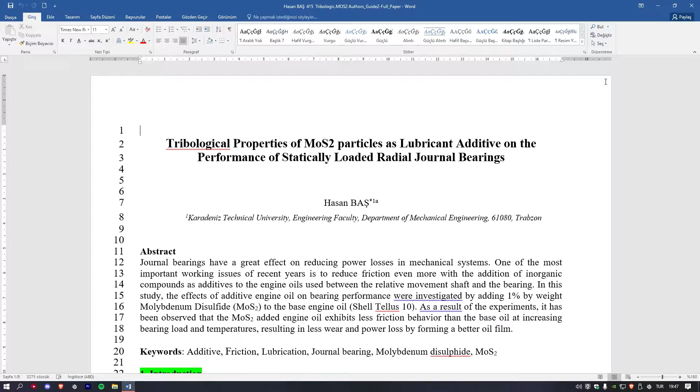My topic is Tribological properties of molybdenum disulfide particles as lubricant additive on the performance of statically loaded radial journal bearings.

Journal bearings have a great effect on reducing power losses in mechanical systems. One of the most important working issues of recent years is to reduce friction even more with the addition of inorganic compounds as additives.

To the engine oils used between the relative movement shafts and bearings. In this study, the effect of additive engine oils on bearing performance was investigated by adding 1% by weight molybdenum disulfide to the base oil Shell Tellus 10.

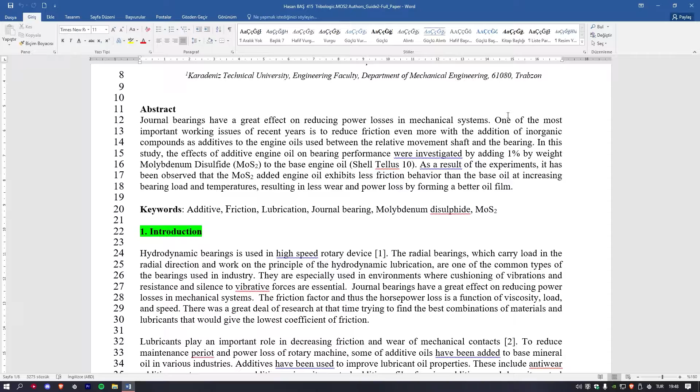As a result of the experiments, it has been observed that the molybdenum disulfide added engine oil exhibits less friction behavior than that of base oil at increasing bearing load and temperatures, resulting in less wear and power loss by forming a better oil film.

Lubricants play an important role in decreasing friction and wear of mechanical contacts. To reduce maintenance period and power loss of rotary machines, some additive oils have been added to base mineral oil in various industries. Additives have been used to improve lubricant oil properties.

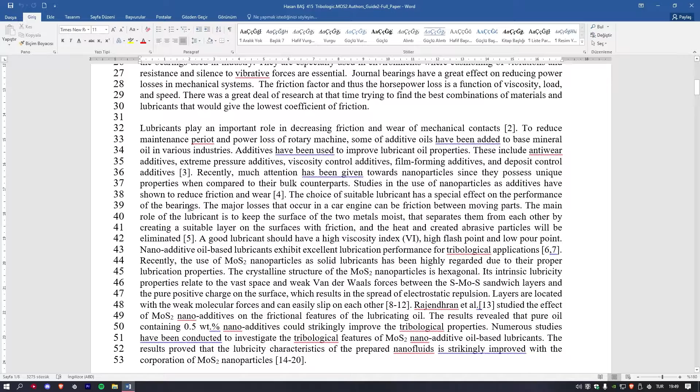These include anti-wear additives, extreme pressure additives, viscosity control additives, film forming additives, and deposit control additives. A good lubricant should have a high viscosity index, high flash point, and low pour point.

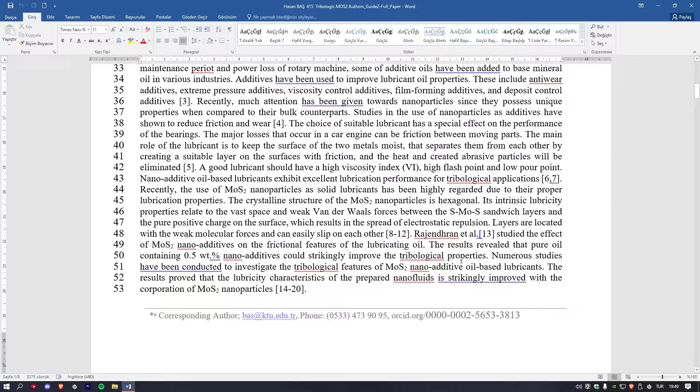Nano-additive oil-based lubricant exhibits excellent lubrication performance of tribological applications. The result revealed that pure oil containing 0.5 weight percent nano-additives could strikingly improve the tribological properties.

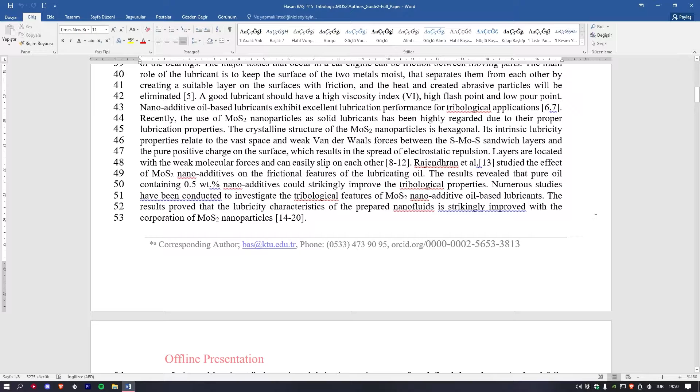Numerous studies have been conducted to investigate the tribological features of molybdenum disulfide nano-additive oil-based lubricant. The results proved that the lubricity characteristic of the prepared nanofluid is strikingly improved with the incorporation of molybdenum disulfide nanoparticles.

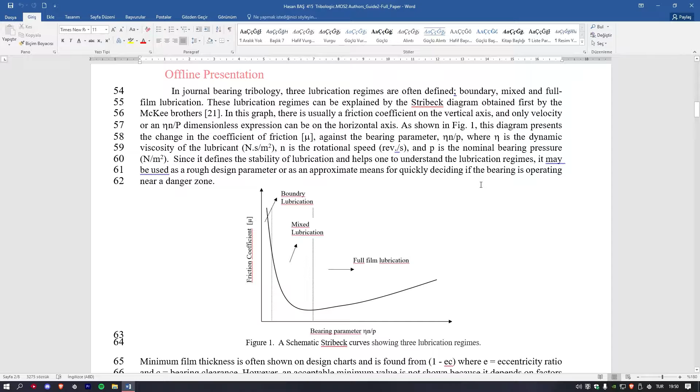In journal bearing tribology, three lubrication regimes are often defined as boundary, mixed, and full film lubrication. These lubrication regimes can be explained by this Stribeck diagram as shown in figure 1.

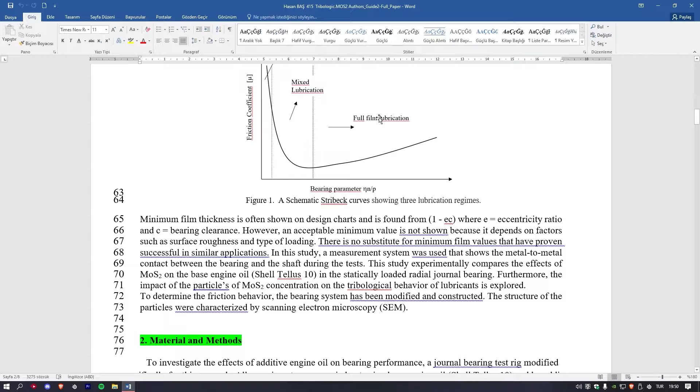This section is boundary lubrication, second section is mixed lubrication, third section is full film lubrication.

In these experimentally working sections, this study experimentally compares the effect of molybdenum disulfide on the base engine oil Shell Tellus 10 in the statically loaded radial journal bearing.

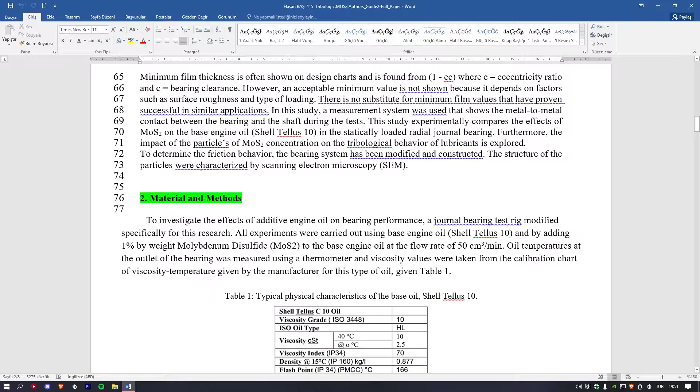Furthermore, the impact of the particles of molybdenum disulfide concentration on the tribological behavior of lubricants is explored. To determine the friction behavior, the bearing systems has been modified and constructed. The structure of the particles were characterized by scanning electron microscopy.

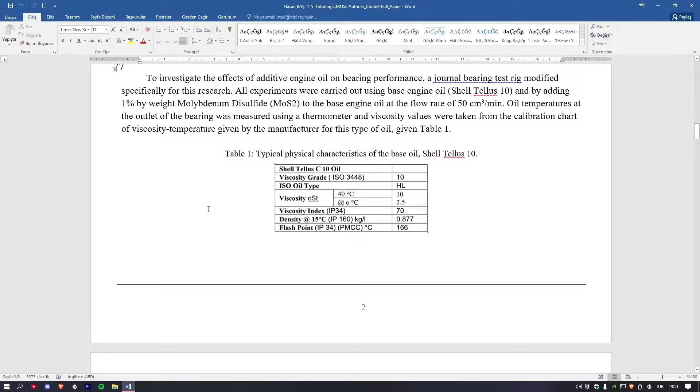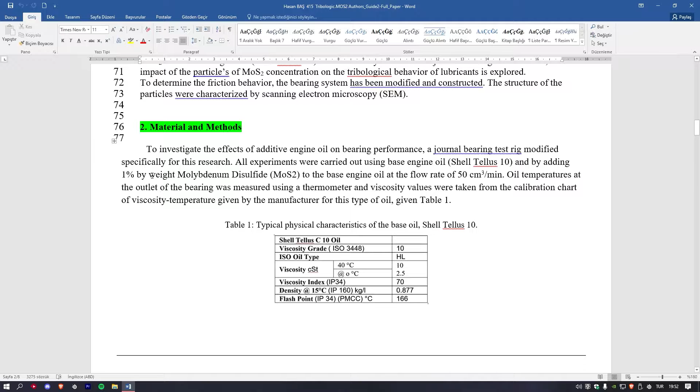Material and methods. To investigate the effect of additive engine oil on bearing performance, a journal bearing test rig was modified specially for these researches.

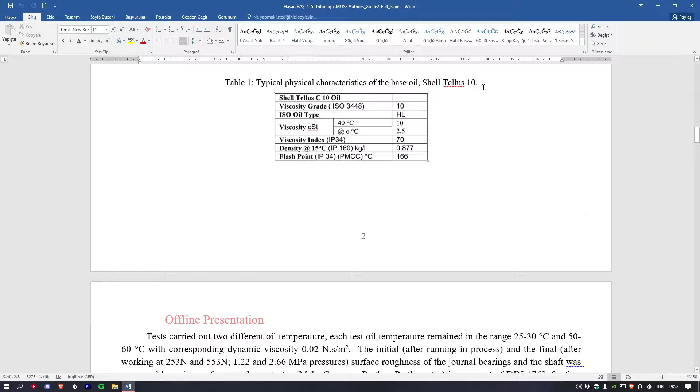Typical physical characteristics of the base oil Shell Tellus 10 are shown in Table 1.

Tests carried out at two different oil temperatures. Each test oil temperature remained in the range of 25 and 30 degrees centigrade, and 50 and 60 degrees centigrade, with corresponding dynamic viscosity of 0.02 Newton seconds divided by square meters.

The initial, after the running-in process, and the final, after working at 253 Newton and 553 Newton.

Surface roughness of the journal bearing and the shafts was measured by using a surface roughness tester in pursuant of DIN 4768.

Surface roughness parameters such as center line average, average peak to valley height, and maximum peak to valley height were measured by using a driving unit.

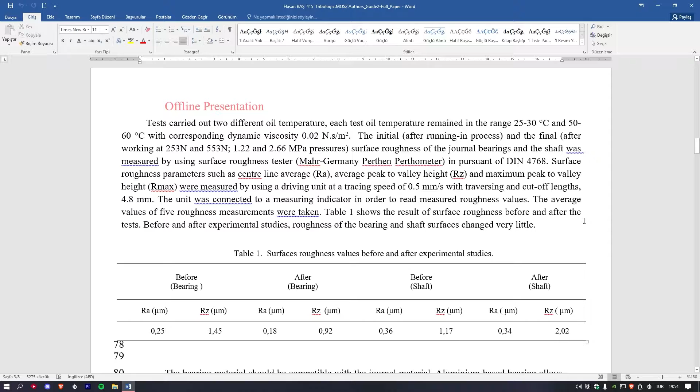The average values of the 5 roughness measurements were taken. Table 1 shows the results of the surface roughness before and after tests.

The chemical composition of the alloys and measured molybdenum disulfide particle size range is shown in Table 2.

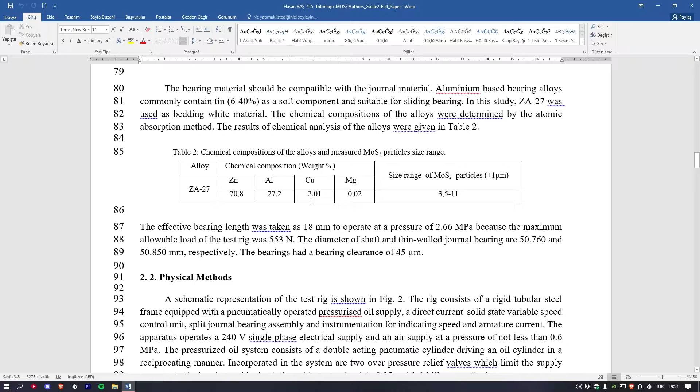The effective bearing length was taken as 18 mm to operate at a pressure of 2.66 megapascal, because the maximum allowable load of the test rig was 553 Newton.

The diameter of the shaft and thin-walled journal bearing are 50.760 and 50.850 millimeters respectively. The bearings had a bearing clearance of 45 micrometers.

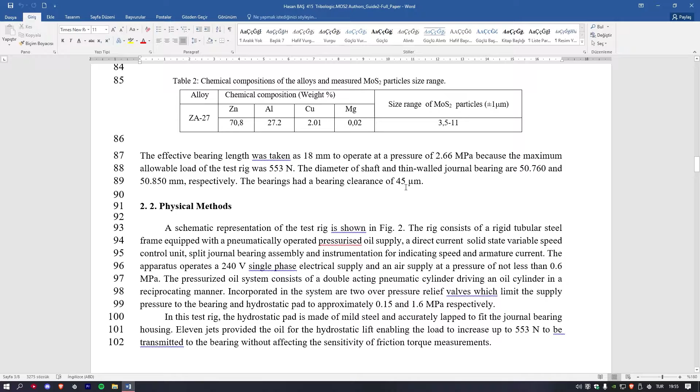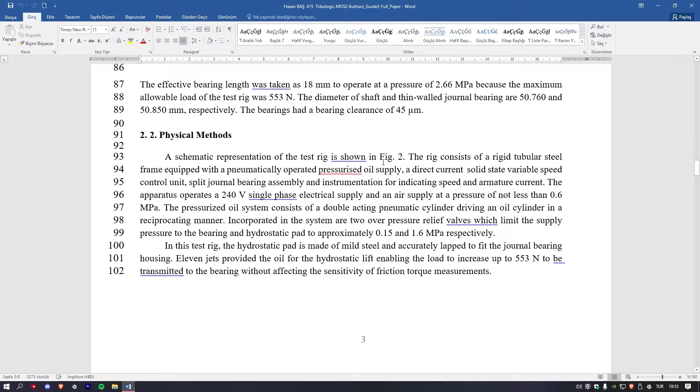Physical methods. A schematic representation of the test rig is shown in figure 2. As shown in figure 2,

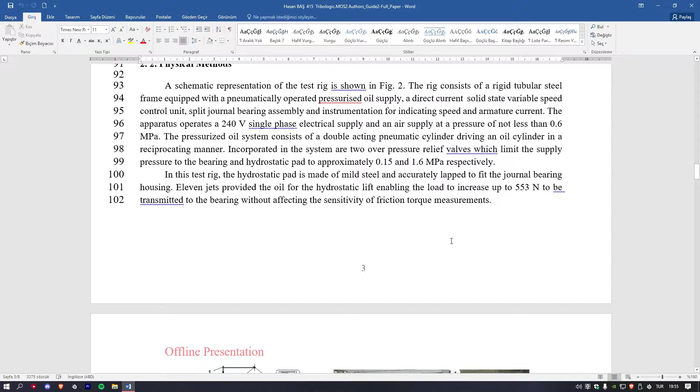The rig consists of a rigid tubular steel frame equipped with pneumatically operated pressurized oil supply, a direct current solid state variable speed control unit, and a split journal bearing assembly, with instrumentation for indicating speed and armature current.

The apparatus operates on a 240 voltage single phase electric supply and an air supply at a pressure of no less than 0.6 megapascal.

In this test rig, the hydrostatic pad is made of mild steel and accurately lapped to fit the journal bearing housing.

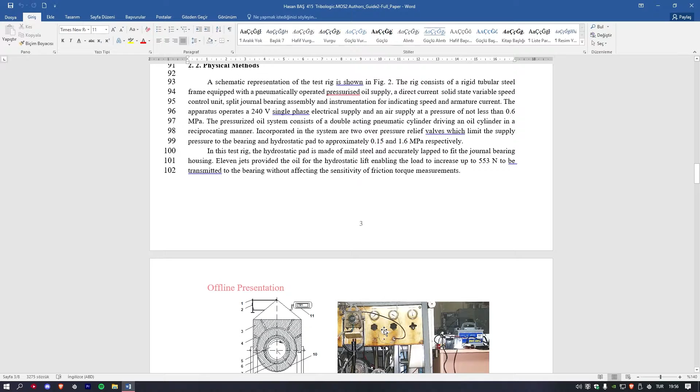11 jets provided the oil for the hydrostatic lift, enabling the load to increase up to 553 Newton, to be transmitted to the bearing without affecting the sensitivity of friction torque measurement here.

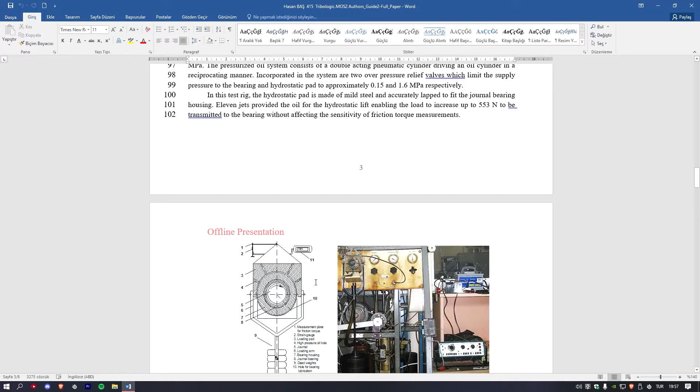The friction torque was measured by using a Wheatstone bridge circuit with strain gauge on the torque plate.

The torque signal obtained from the bridge circuit was transmitted to the recorder, and this enabled monitoring and recording the signals.

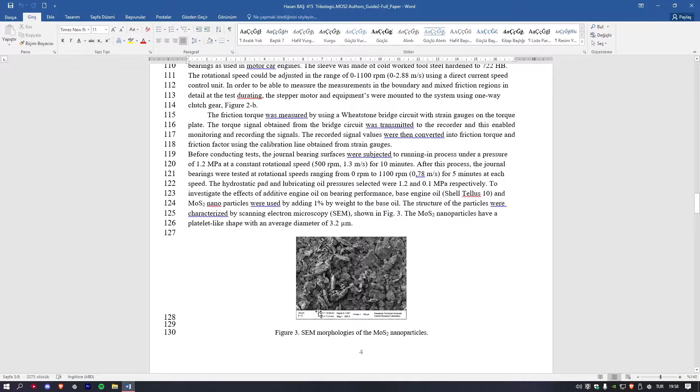After this process, the journal bearings were tested at rotational speeds ranging from 0 to 1100 RPM for 5 minutes at each speed. Then the structure of the particles were characterized by scanning electron microscopy, as shown in figure 3. The molybdenum disulfide nanoparticles have a platelet-like shape with an average diameter of 3.2 micrometers.

Results and discussions. It's seen in figure 4. As shown in figure 4, using molybdenum disulfide additives, lower friction torque values were obtained in the test compared to the base oil. This difference is even more pronounced in boundary and mixed friction regions.

For example, an average increase of 0.3 and 0.6 Newton meter is observed in the friction torque at 253 Newton and 553 Newton bearing loads in the boundary friction region respectively. It is seen that the friction torque values in the bearing increase with the increasing bearing load. As a result, it has been determined that the effect of molybdenum disulfide additives is dominant in the metal-to-metal contact operation conditions than that of the liquid film regions.

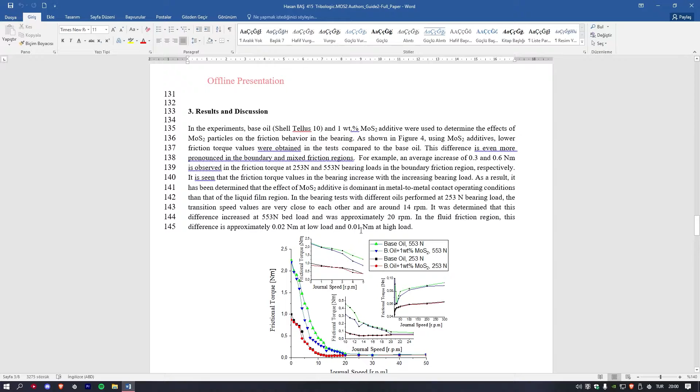In order to determine the friction coefficient in the plain bearing, firstly the peripheral friction force values in the bearing were measured, and then the friction coefficient values in the bearing were obtained by taking the ratio of this friction force to the bearing load. The effect of different oil on the friction coefficient is given in figure 5.

As can be seen in figure 5, higher friction coefficient values were obtained in the base oil test compared to the molybdenum disulfide additive oil. This difference is even more pronounced in the boundary and mixed lubrication regions. It's seen that the friction coefficient values formed in the bearing decrease with the increasing bearing load.

The reason for the decrease may be that, compared to the friction force, the increase in the bearing load is higher, or the internal friction of the oil decreases as a result of the thinning of the oil film between the surfaces. As a result, it has been determined that the effect of surface roughness is effective in terms of friction coefficients under metal-to-metal contact operating conditions.

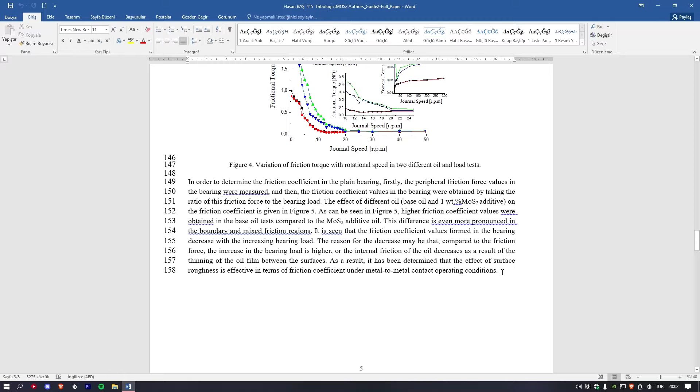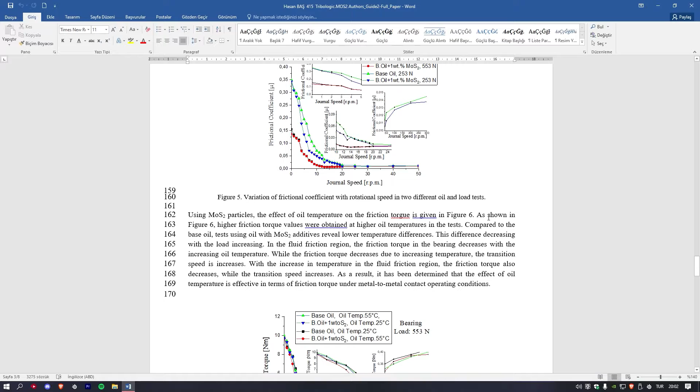Using molybdenum disulfide particles, the effect of oil temperature on the friction torque is given in figure 6. As shown in figure 6, higher friction torque values were obtained at higher oil temperatures in the tests. Compared to the base oil, these tests using oil with molybdenum disulfide additives reveal lower temperature differences. These differences decrease with the load increasing.

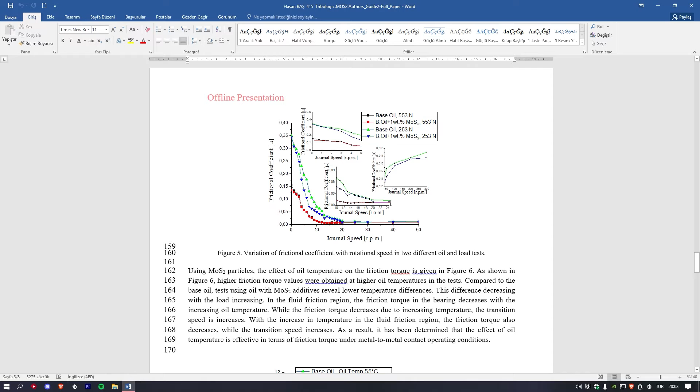In the fluid friction region, the friction torque in the bearing decreases with the increasing oil temperature, while the transition speed increases. With the increase in the temperature in the fluid film friction regions, the friction torque also decreases while the transition speed increases. As a result, it has been determined that the effect of oil temperature is effective in terms of the friction torque under metal-to-metal contact operating conditions.

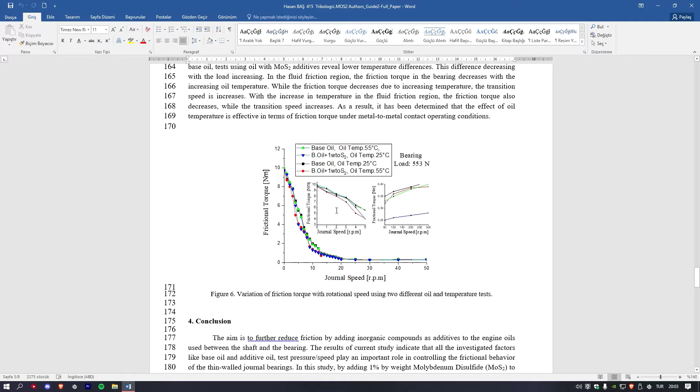Conclusions. The aim of this study is to further reduce the friction by adding inorganic compounds as additives to the engine oils used between the shaft and bearings. The results of current study indicate that all the investigated factors, like base oil and the additive oil, test pressure, test speed, play an important role in controlling the friction behavior of the thin-walled journal bearings.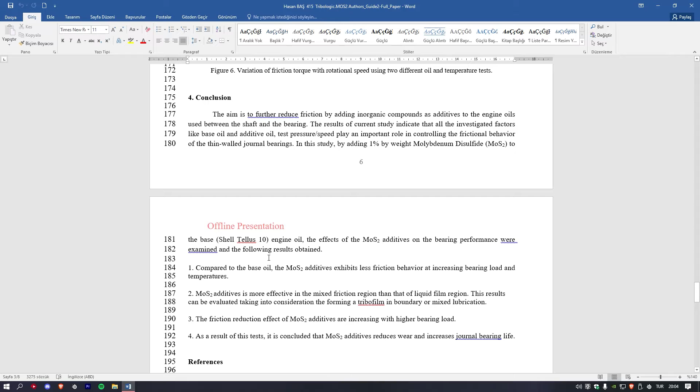In this study, by adding 1% by weight molybdenum disulfide to the base oil Shell Tellus 10 engine oil, the effect of molybdenum disulfide additives on the bearing performance were examined and the following results obtained: 1. Compared to the base oil, the molybdenum disulfide additives exhibit less frictional behavior at increasing bearing load and temperatures. 2. Molybdenum disulfide additives are more effective in the mixed friction region than that of the liquid film region. These results can be evaluated taking into consideration the forming of tribofilm in boundary or mixed lubrication.

3. The friction reduction effects of molybdenum disulfide additives increase with higher bearing loads. 4. As a result of these tests, it is concluded that molybdenum disulfide additives reduce wear and increase journal bearing life.